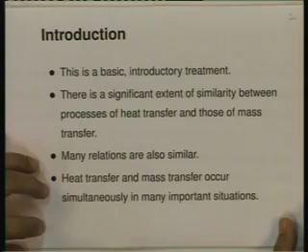For example, clothes hung out to dry in the sun. The process of drying is a process of combined heat and mass transfer.

What are we going to study in these few lectures on mass transfer? First, a basic law pertaining to mass transfer is the Fick's law of diffusion. We will look at it in some detail. Then we will look at some one-dimensional problems in a stationary medium, followed by mass transfer in a moving medium.

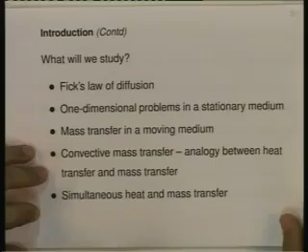Then we will look at convective mass transfer. In particular, we would study the analogy between heat transfer and mass transfer. And finally, we will spend some time on simultaneous heat and mass transfer, situations in which we have to consider heat transfer as well as mass transfer occurring together.

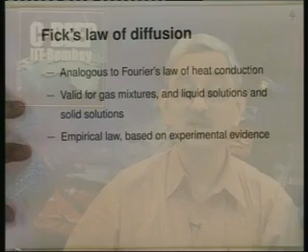Let us begin our study of mass transfer by looking at the Fick's law of diffusion. The Fick's law of diffusion is analogous to Fourier's law of heat conduction. One can say that the Fourier's law of heat conduction represents or models the diffusion of heat through a material medium. The Fick's law considers diffusion of mass through a material medium.

The Fick's law of diffusion is valid for gas mixtures, and our initial illustrations would essentially be on gas mixtures. It is also valid for liquid solutions and solid solutions. We should notice that the Fick's law of diffusion is an empirical law and is based on experimental evidence, similar to Fourier's law, which is an empirical law and is based on experimental evidence.

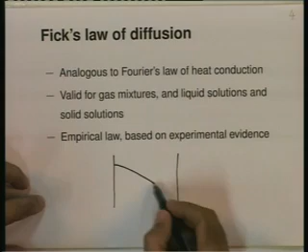Suppose we have a confined gas in which there is a mixture of gases. Let us say that we have a concentration of some component A. A is more densely packed on the left hand side, is more sparsely packed on the right hand side. So the A has a higher concentration near this zone, A has a lower concentration at this end. Because of this concentration gradient, decrease in concentration as we move to the right, let us say this is direction x.

There is a flux or a flow at the microscopic level of component A. This is known as the diffusion of A. Fick's law relates the concentration gradient to the rate of diffusion of A.

Let us consider a mixture of two gases, A and B, and let us consider gas A diffusing into gas B. The Fick's law of diffusion says that the mass flux of gas A in a particular direction n is proportional to the density of the mixture and the concentration gradient in that direction. n is the direction variable and WA is the mass fraction of component A.

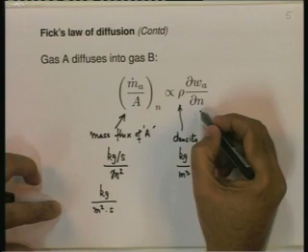On the right hand side we have density, with units kg per meter cube. n is the space variable, direction, with units meters, and WA is the mass fraction of A, which is a dimensionless number. If you want units, you can write the units as kg of A per kg of mixture.

Now since we have two components A and B, we must know what is meant by the mixture density rho, the mass fraction of A, and the mass density of A. Let us say that rho A is the mass density of A. The units will be kg of A per meter cube of mixture. Similarly, the second component B will have a mass density of B, which will be kilogram of B per meter cube of mixture. And this is the gross or total density, which is the sum of the densities of component A and component B, and it will have units kg per meter cube.

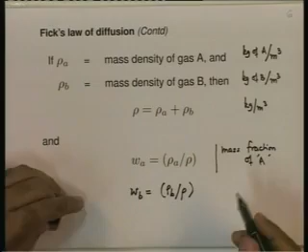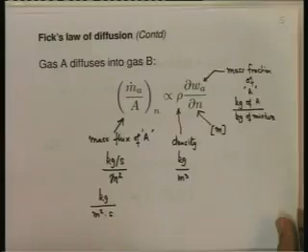We have seen that the basic form of Fick's law of diffusion gives us a proportionality between the mass flux of A and its concentration gradient. The constant of proportionality is called the mass diffusion coefficient, or diffusion coefficient, given the symbol D with subscripts AB. AB indicates that the mixture is made up of components A and B, and A is diffusing into B.

With this constant of proportionality, Fick's law of diffusion looks like this: the mass flux of component A in direction n equals minus rho DAB times the partial derivative of WA in that direction.

Notice the negative sign, very similar to the negative sign in Fourier's law of heat conduction. We put the negative sign to indicate that when the concentration of A decreases in a particular direction, the mass flux is towards that direction. Just as heat gets conducted down a temperature gradient, mass in a mixture diffuses down a concentration gradient, from a zone of higher concentration to a zone of lower concentration.

Notice the similarity between this and Fourier's law of heat conduction.

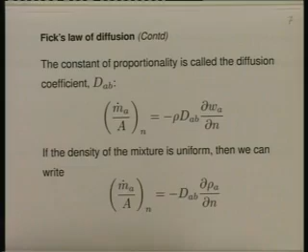Suppose we select a Cartesian coordinate system. In a Cartesian coordinate system we will have three directions: x, y and z. Fick's law in each direction can be written down in terms of three relations, one for the x direction, one for the y direction and one for the z direction. Notice that the diffusion coefficient for component A diffusing into component B is the same in the three directions. This indicates that for the purpose of writing these expressions, we have assumed an isotropic mixture.

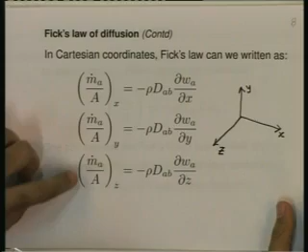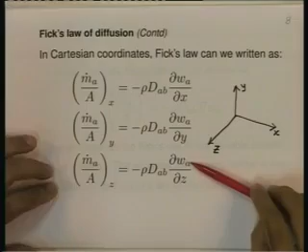We may also express Fick's law of diffusion in a vector form. On the left hand side we will have a mass flux vector, with three components: mass flux in the x direction, mass flux in the y direction and mass flux in the z direction. On the right hand side we have density and the diffusion coefficient, which are scalars, and the gradient of the mass fraction. The gradient of mass fraction will be a vector, and its three components would be the partial derivative of WA with respect to x, with respect to y, and with respect to z.

The advantage of writing Fick's law in vector notation is that we can expand it in any suitable system of coordinates. We can do it in Cartesian coordinates and we get the equations we saw earlier. If you need to solve a problem in cylindrical polar coordinates or spherical polar coordinates, all we have to do is express the left hand side and right hand side in the appropriate coordinate system. The three components will be specific to that coordinate system, and we get the expressions for Fick's law in that particular coordinate system.

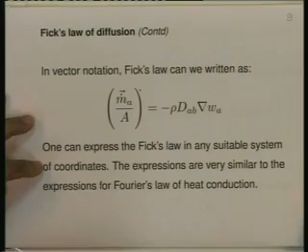In fact, you should notice that the expressions are very similar to the expressions for Fourier's law of heat conduction. So if you have a form of Fourier's law of heat conduction for a particular coordinate system, by analogy you can write Fick's law of diffusion in that particular coordinate system.

Quite often we express the composition in terms of mole fraction and molar density. So if the concentration of gas A is expressed in its mole fraction Xa or molar density Ca, we can express Fick's law in terms of these. This will now be the molar flux of component A, in kg mole of A per meter square per second. On the right hand side, C is the molar density of the mixture, that is kg moles per meter cube.

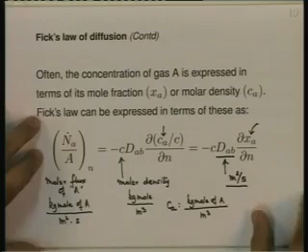N is the direction. Ca is the molar density of component A, in kg mole of A per meter cube, and Xa is the mole fraction of A, that would be kg mole of A per kg mole of mixture. Notice that DAB, the diffusion coefficient, will have the units meter square per second. In whichever form of Fick's law we use, the diffusivity will have the units meter square per second.

Continuing with the molar density form, if Ca is the molar density of gas A and Cb is the molar density of gas B, units will be kg mole of A per meter cube of mixture, and Cb will be kg mole of B per meter cube of mixture. Then the total molar density is Ca plus Cb, and the mole fraction of A will be Ca divided by C.

As in the case of the mass fraction based formulation, if we find that the molar density of a mixture is uniform, we can write Fick's law in a slightly simpler form in terms of the molar density. Here the units on the left hand side would be kg mole of A per meter square second, and on the right hand side this will be kg mole of A per meter cube, N will be in meters and D will be in meters square per second.

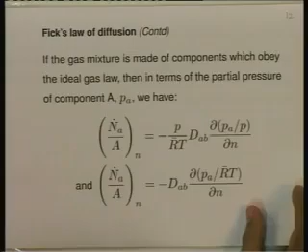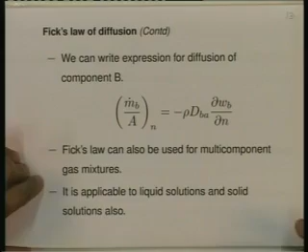We have so far considered only two components A and B, but Fick's law does not restrict itself to two component situations. It is applicable to multi-component gas mixtures also. Not only that, it is also applicable to liquid solutions and solid solutions. A solid diffusing into a liquid, a gas diffusing through a liquid, one liquid diffusing through another liquid, or a solid, liquid or gas diffusing through a solid. For example, hydrogen or helium diffusing through a metal sheet or through a rubber hose. Fick's law is applicable even in these cases.

Let us now look at the diffusion coefficients. There are handbooks and reference books in which you will find values of diffusion coefficients tabulated for a large number of cases. This is an illustrative table tabulating diffusion coefficient of some gases in air at 1 atmospheric total pressure and 25 degrees C. Diffusion coefficients are reasonably significant functions of both pressure as well as temperature. So whenever you read a value of diffusion coefficient, note down the pressure and temperature at which it is tabulated.

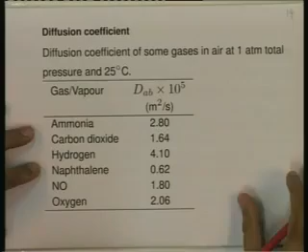Here we see the variation of diffusion coefficient of water vapor in air with temperature. The total pressure remains 1 atmosphere, but the temperature goes from 200 to 400 Kelvin in some steps. You will notice that the diffusion coefficient increases, actually it more than doubles when the temperature goes from 200 Kelvin to 400 Kelvin. There is a monotonic increase in the diffusion coefficient. This is the general trend for diffusion coefficients of gases.

Quite often we need to obtain a diffusion coefficient at a pressure and temperature slightly different from that tabulated, and more often we need to interpolate between tabulated values of pressure or tabulated values of temperature.

For a gas or a vapor diffusing through a gaseous medium, the diffusion coefficient increases as the temperature increases, as we have seen for water vapor in the previous table, and the diffusion coefficient decreases if the pressure increases. So, there is some sort of a direct relation to temperature, but an inverse relation to pressure.

That is why you will notice that as temperature increased by a factor of 2 for water vapor from 200 Kelvin to 400 Kelvin, the diffusion coefficient increased from 2.12 times 10 raised to minus 5 to 4.61 times 10 raised to minus 5, a factor of more than 2. That is why this exponent n here is a number greater than 1, but less than 2, and is typically around 1.5.

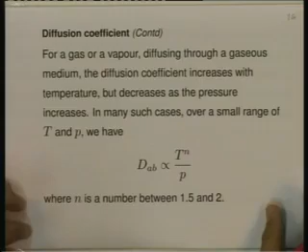This proportionality can be used to interpolate or slightly extrapolate the data for diffusion coefficient. Now, after this discussion on Fick's law and something about the diffusion coefficient, we will look at the next topic, which is the steady state mass diffusion in a stationary medium.

We are going to look at some simple problems during this set of lectures. Here we will look at a typical problem. The statement of a typical problem has the following situation: we are going to look at steady state diffusion of a gas through a stationary large isothermal slab of width b.

The slab may not be a physical solid slab, it could be a liquid layer, it could be a layer of a gas, but we will use the generic word slab, meaning a region of uniform thickness and large dimensions in the other directions. The mass fraction of the gas on the two faces of the slab is different, WA1 and WA2.

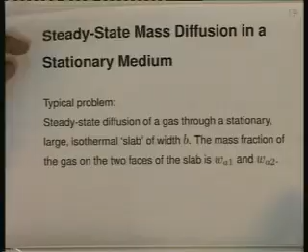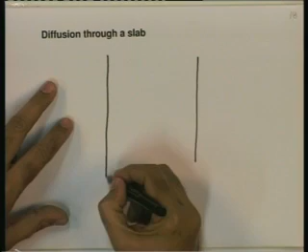Let us sketch the situation. We are considering diffusion through a slab. Let us say we have a slab of width b, a plane parallel slab. It is very large in this direction, also in that direction. So, if this is the z direction, it is finite in extent, width b, but in x and y direction, it is infinitely large.

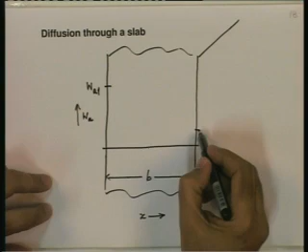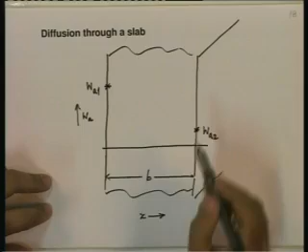And let us say that if we plot the mass fraction of A, at this face of the slab, we have maintained it at a value WA1, and at the other face of the slab, we maintain it as WA2. So, if the mass fraction is large here and the mass fraction is small here, the component A will diffuse through the slab from left to right.

And there will be a concentration gradient set up from the left to the right. So, this is the gradient of concentration of A, which leads to diffusion of A. We will say we have gas A on this side, we also have the same gas on this side, and the second component B is the slab.

So gas A diffuses through the slab, which is component B. In this particular case, one component is a gas, the other component could be a solid, it could even be a liquid layer.

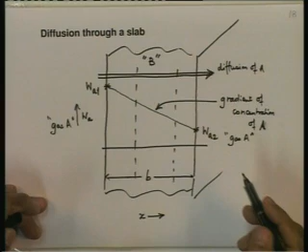Now, we have considered a steady state and a one dimensional situation. Since the slab is stationary and does not move, in steady state, if you take any plane parallel to any face of the slab, the flow of this diffusing component will be constant through here, through here, through here, because it is steady state, and the amount of gas crossing one plane should equal the amount of gas crossing any other plane. That means m dot A is a constant independent of x, and the mass flux of A would also be constant and uniform along the thickness of the slab.

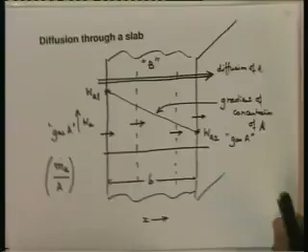So again, since we have a steady state and a one dimensional situation, the mass flux would be constant, independent of x, the location along the thickness of the slab, and by Fick's law this should equal minus rho into D_AB into dWA by dx. Notice that since we have a steady state and one dimensional situation, we use an ordinary derivative here and not a partial derivative.

Now, if we assume the density of the medium to be constant, this would be a very good assumption if the density of slab B is much higher than the density of gas A which diffuses through. Generally it is a very good assumption. If the density of the medium is assumed constant, the right hand side can be written in terms of the mass density of component A. Here we have the derivative of rho A instead of the derivative of WA.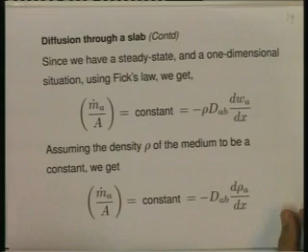Now this is a constant, hence this also is a constant. And now, if the diffusion coefficient is constant, and we have said that the slab is isothermal, it is expected that in steady state the temperature of the gas will not change as it diffuses through the slab, and hence its diffusion coefficient is likely to stay at some constant value. Then we can straight away integrate the equation.

If we integrate it from x equal to 0 to x equal to b, along the full length of the slab, we will get the mass flux equal to the diffusion coefficient multiplied by the difference in mass density of component A on the two sides of the slab, divided by the thickness of the slab. Or in terms of mass fraction, we have the mass fraction difference divided by the thickness of the slab, multiplied by the diffusion coefficient multiplied by the density. Okay, compare this with the result for steady state conduction through a plane parallel slab.

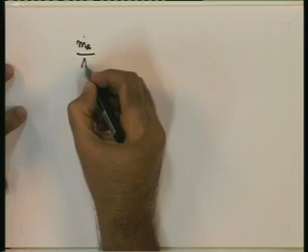You will find that the heat flux is equal to K into T1 minus T2 divided by B. I will write that equation again: the mass flux across an infinite parallel slab in steady state, and the corresponding equation for heat flux across a plane parallel slab in steady state, is K times T1 minus T2 divided by B.

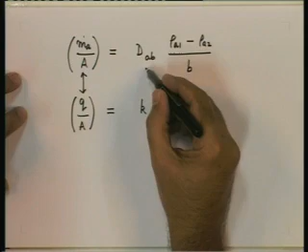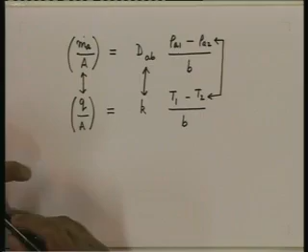Notice the analogy and similarity. We have the mass flux, we have the heat flux. In heat flux there are no components; in mass flux we have component A. We have the conductivity of the material; in mass transfer we have the diffusion coefficient. Thickness of the slab is in the denominator, a geometric parameter that does not change, the same in both conduction and mass transfer. And now temperature is the analogous variable to mass density. We will keep noticing the analogies between conduction and mass transfer, and convection and mass transfer, as we proceed.

If we integrate the equation, not fully over the slab, but from x equal to 0 to some x within the slab, then that integration and the previous integration will give us an expression for the concentration profile or mass fraction profile in the slab. And since we have assumed density uniform, this becomes rho A1 minus rho A divided by rho A1 minus rho A2 equals x by b.

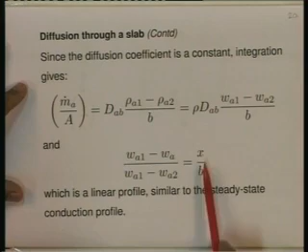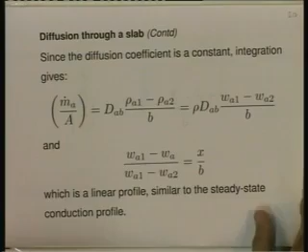Again, a similar result to the steady state conduction result. The mass densities will be replaced by temperatures, and x and b will just be x and b. A linear temperature profile there, a linear concentration profile here.

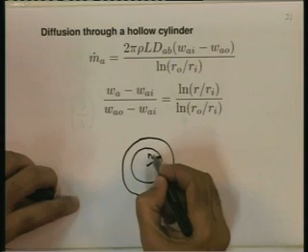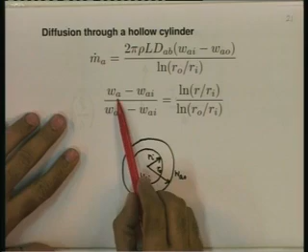If you solve the one-dimensional steady state mass diffusion problem through a hollow cylinder, we get an expression very similar to that for conduction across a hollow cylinder. Here we have a cylindrical shell with inner radius Ri, outer radius Ro, inner mass fraction Wai, and outer mass fraction Wao. The diffusion mass flow of component A over a length L of the cylinder, and the mass fraction profile, are perfectly analogous to those for one-dimensional steady state heat conduction through a hollow cylinder.

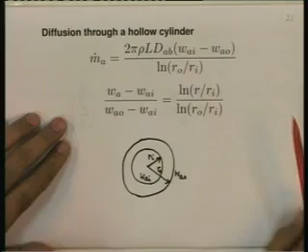What is true for a hollow cylinder is also true for a hollow spherical shell. Here too it is assumed we have a spherical shell with inner radius Ri, outer radius Ro, inner mass fraction Wi, and outer mass fraction Wo. Again, the two expressions are perfectly analogous to the heat conduction equations. All you need to do is replace mass flow rate by heat flow rate, diffusion coefficient by conductivity, and mass fractions by temperature.

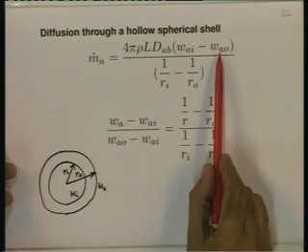Let us look at a simple problem. We have to determine the rate at which hydrogen will diffuse through a steel plate 4 centimeters thick, face area of 2 meters square, uniform temperature of 400 K. Hydrogen diffuses through steel and causes embrittlement, that is a known fact. The concentration is given on the two sides as 0.1 and 0.01 kilogram per meter cube. This is mass densities.

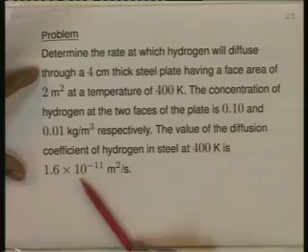Let us consider this problem. We have hydrogen diffusing through a 4 centimeter thick steel plate. Face area of the plate is 2 meters square and it is at a uniform temperature of 400 K. The concentration of hydrogen, that is its mass densities on either side, is 0.1 kg per meter cube and 0.01 kg per meter cube. The diffusion coefficient of hydrogen in steel at 400 Kelvin is given as 1.6 into 10 raised to minus 11 meters square per second. Notice how small it is, but even then it is known that hydrogen diffuses slowly but surely through steel and causes embrittlement leading to pitting.

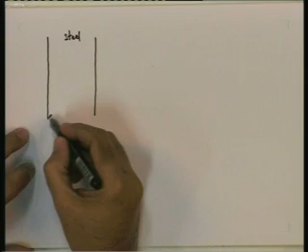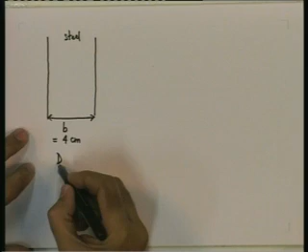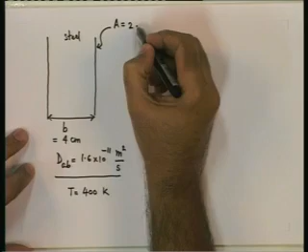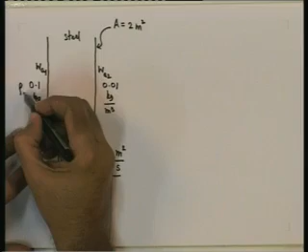Let us solve this problem. Let us sketch the situation. We have a steel slab, the thickness B is 4 centimeters, 0.04 meters. DAB is given as 1.6 into 10 raised to minus 11 meters square per second. Uniform, because it is given that the temperature is 400 Kelvin, which also is uniform. The surface area of the slab A is 2 square meters. WA1 and WA2 are given as 0.1 and 0.01 kg per meter cube. Since these are kg per meter cube, this is actually rho A1 and rho A2. Steady state, one dimensional situation.

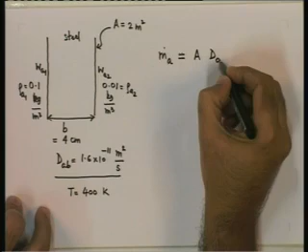Our equation for diffusion rate of component A, hydrogen in this case, becomes in terms of mass density of component A, area, diffusion coefficient into the difference in mass densities, divided by thickness of the slab. Substituting here, area is 2 meters square multiplied by diffusion coefficient, which is 1.6 into 10 raised to minus 11 meters square per second, multiplied by density difference, which is 0.10 minus 0.01, divided by the thickness, which is 4 centimeters, so 0.04 units. For density difference, kg per meter cube, and for the thickness of the slab, meter. You will find that we have meter raised to 4 in the numerator, meter raised to 4 in the denominator, so the units which remain are kilograms per second, the proper units for mass flow rate. Multiplying this out, we get 7.2 into 10 raised to minus 11 kilogram per second. That is the answer we were looking for.